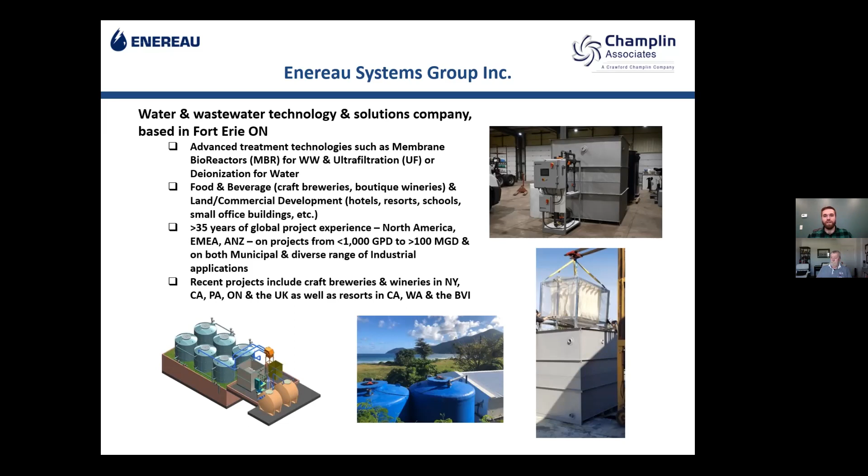We're a pumps and controls company. We're based in Essex, Vermont, kind of up near Burlington, if you know where that is. But we service all of New England and beyond. We go all the way down to Pennsylvania, Maryland for certain projects. But we are pumps and controls guys. For the main part, we do a lot of work with municipalities. So we deal with a lot of the regulatory side of things that come into brewing.

But we've recently been getting into water and wastewater treatment. And so we rep a number of different treatment systems here for high strength wastewater as well. We do everything from pH adjustment to pumps to treatment and everything in between that you could possibly think of. So we service all of New England.

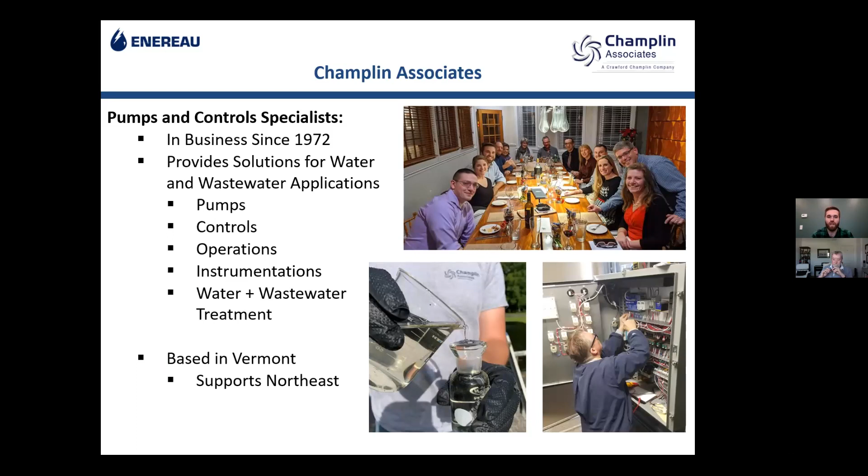Okay, so brewery wastewater. What's the big deal?

So what's the big deal about wastewater coming out of your brewery? It feels like it's just beer, yeast, hops, some other stuff. It's not like you're dumping a bunch of harmful chemicals down the drain. And plus, you just want to brew beer. You're not interested, and you frankly don't have the time for managing your wastewater as well.

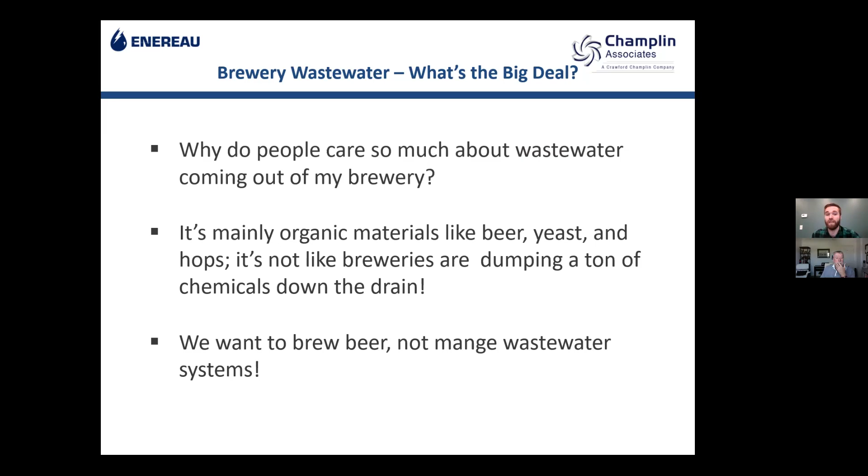And while these thoughts are totally understandable, the creation of wastewater is part of the brewing process, and it's important for brewers to know the basics of wastewater because frankly, you create a lot of it. In order to understand the impact a brewery has on its town's wastewater treatment plants or its private leach field and why so many regulations are put on breweries, we need to understand some basics about wastewater and how it's treated.

So, wastewater at treatment plants and for leach fields is typically measured in two main factors. You have flow and biochemical oxygen demand, or BOD. Flow is simply the amount of wastewater produced, and it's typically measured in gallons per day, while BOD is a measurement of organics in water. So you can think of it as how strong your wastewater is.

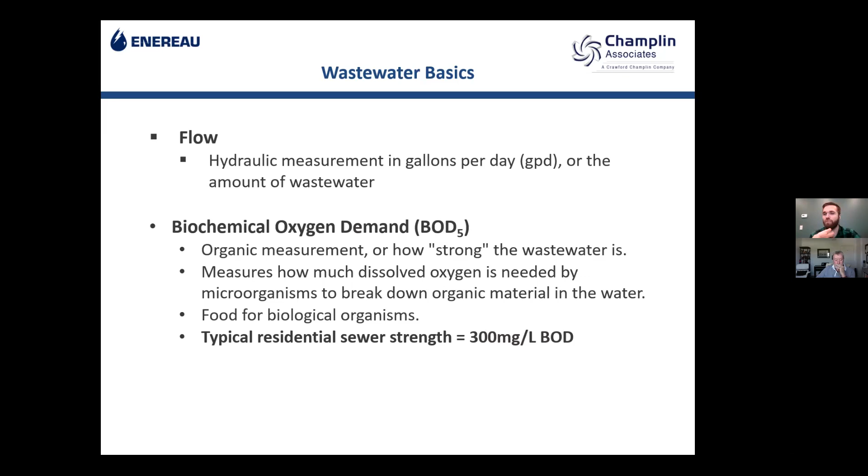A good way of thinking about BOD is as food for biological organisms. These organisms that live in your municipal wastewater treatment plant or septic system need food and oxygen to survive. So if too much food, BOD, is introduced in your wastewater, the organisms will reproduce too quickly, consume all the oxygen in that system, and die, killing the entire plant. For reference, residential strength sewer, the stuff that's coming out of your house and toilets, is measured at about 300 milligrams per liter of BOD.

So wastewater basics, how to measure it. Wastewater treatment plants have a design capacity for both flow and BOD. These two metrics work together to derive how many pounds of BOD a day the plant can handle. To find your pounds of BOD per day, you take your flow in million gallons per day, multiplied by your average BOD, multiplied by 8.34, and that gives you your pounds of BOD a day.

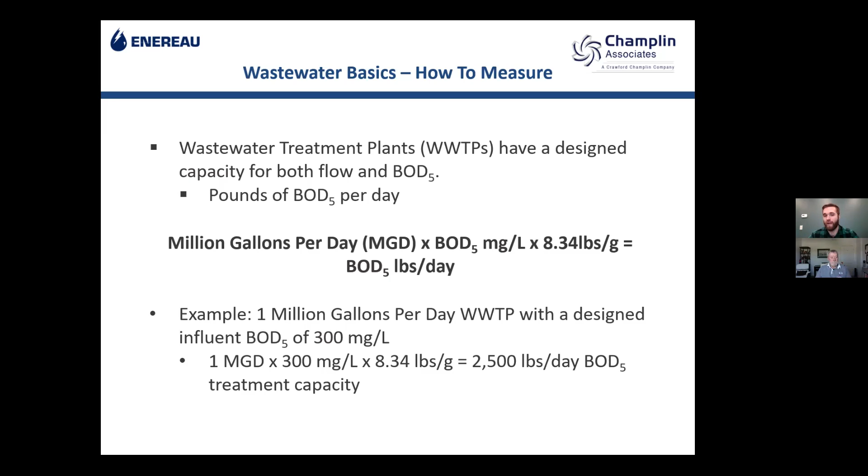So we see here that a 1 million gallon per day wastewater treatment plant designed for an influent BOD of 300 milligrams per liter, which is that regular residential level, has a treatment capacity of about 2,500 pounds of BOD a day. Now that sounds like a lot, but let's look at some brewery examples. Pounds of BOD per day is often how towns measure the wastewater of waste producers as well.

Looking at this brewery example, if Brad's Brewery discharges 5,000 gallons per day of wastewater at about 5,000 milligrams per liter of BOD, with that calculation, they're producing about 208.5 pounds of BOD a day. In comparison, your average residential home produces only about half a pound of BOD a day. That means Brad's Brewery equates to about 417 homes worth of wastewater treatment capacity. Now we're starting to see why breweries are a target for municipal regulations.

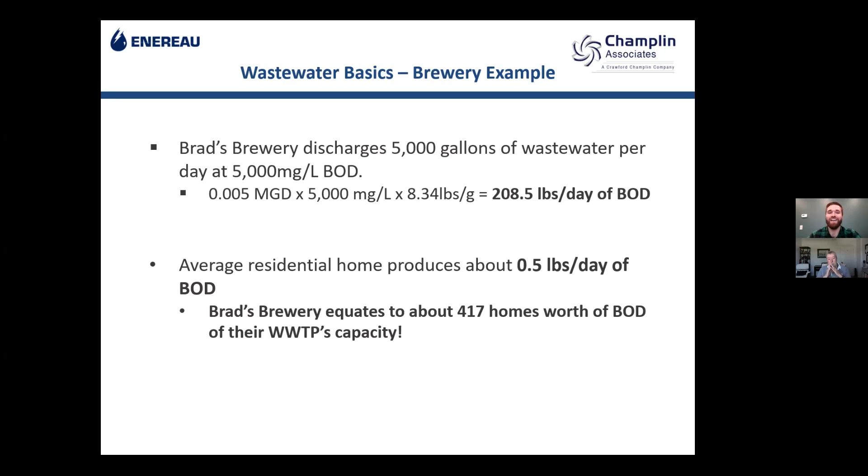And Brad's Brewery's example isn't out of the ordinary. So let's look at wastewater coming out of your average brewery. We see nationally that 2 to 8 gallons of wastewater are produced for every gallon of beer. If your brewery has great process control, you may fall between 2 to 4 gallons of wastewater per gallon of beer, but most breweries fall between 4 to 6 gallons, and those with very poor process controls can go above 15 gallons of wastewater for every gallon of beer that you're brewing.

For BOD, breweries typically fall between 3,000 to 7,000 milligrams per liter on average, with great process control being as low as 2,500 milligrams per liter and very poor process control averaging over 15,000 milligrams per liter of BOD, which, when you put it in that calculation, equates to an insane amount of pounds of BOD, taking up a lot of that wastewater treatment capacity.

For reference, pure beer can be measured at over 65,000 milligrams per liter of BOD, which means that 1 gallon of beer equates to about half a pound of BOD, which we just saw is the same amount as a single residential home.

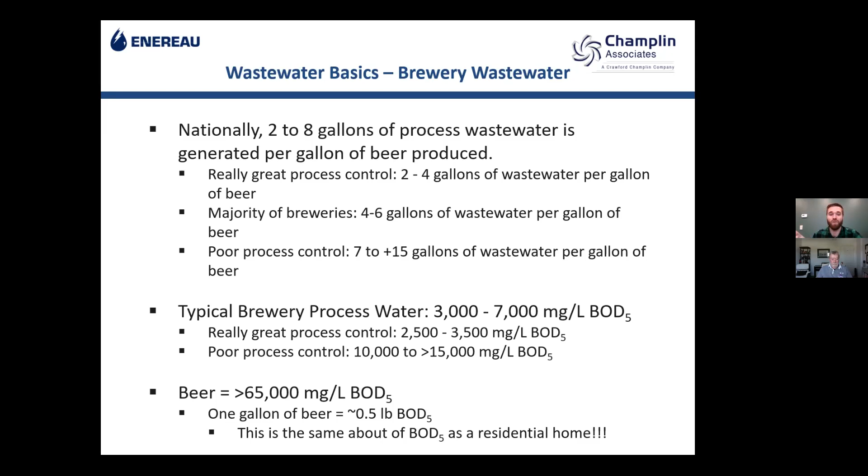So brewery wastewater is some pretty potent stuff. But what's the typical response to brewery wastewater by municipalities? One big response that we're hearing is to tax them into submission. In order to protect themselves from industries dumping all their waste down the drain and overloading their wastewater treatment plant, many towns are starting to implement high-strength wastewater surcharge fees.

Other times, municipalities may not even take your wastewater at all if it's over a certain BOD threshold. Typically, we see that around 300. It depends on your municipality, so you'll need to be in contact with your local town and whatever your governing ordinance is to see what those levels are.

But if your municipality isn't letting you dump down the drain, that means you're being forced to pay someone to haul all of your wastewater to a different wastewater treatment plant that will actually accept your wastewater. And that's going to be some astronomical hauling fees if you're hauling just about everything that you make away.

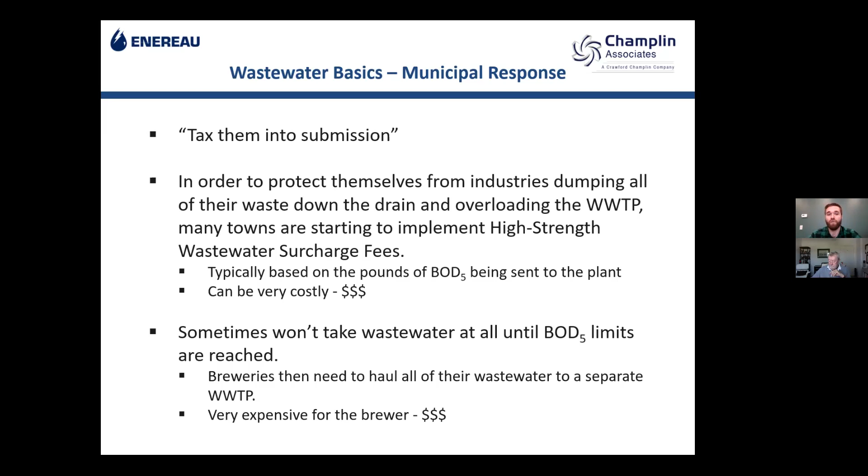So now what? All of that probably sounds like some really bad news so far, and you're probably asking, great, I know I have a problem. How do I fix it? And that's a great question. So there are two main things you can do to bring down your BOD right now: sidestreaming and pretreatment. So every single brewery should be using sidestream practices, regardless of their size.

Sidestreaming is just the process of taking process waste from different brewing stages and removing it from the waste stream. This includes any practice that reduces the volume of process water generated or keeps high-strength waste out of the process wastewater. That includes the separation, collection, or removal of high-strength solids like your spent grains, high-strength liquids like spilled beer, and first rinses, and taking this collected waste offsite for reuse or disposal, whether it be compost, feed to pigs, maybe a digester or something like that.

By separating and collecting high-strength solids, your spent grains, mash tun, trub, yeast, and liquid, your first rinse, keg dumps, spilled product for offsite disposal, you can significantly reduce the BOD of your wastewater. Oftentimes, though, sidestreaming isn't enough to avoid those high-strength waste fees. Even with great sidestreaming, you're probably hanging around that 2,500 milligram per liter BOD mark if you're very good at your sidestreaming.

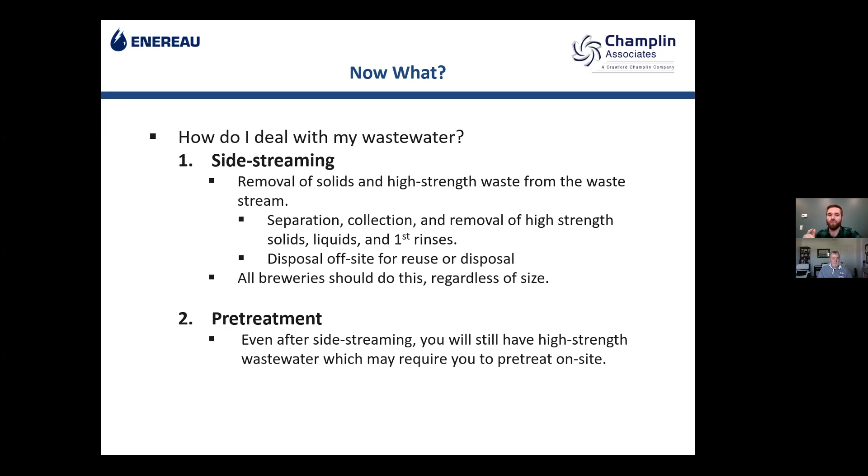So sidestreaming might not be enough to meet your regulatory standards or to keep your septic system from getting overloaded. In that case, you need to start looking at some pretreatment systems. So now that you have the basics of wastewater down, kind of flew through that, I'm going to turn the rest of the presentation over to Jim from Enereau to talk about sustainability and pretreatment.

First, I'll take myself off of mute.

Okay, so as Alec asked right up front, why are we doing this? Why are we treating brewery wastewater? Well, apart from the topics that Alec covered, it is the environmentally responsible thing to do for any high-strength, potentially hazardous wastewater. And what's coming out of the brewery, as Alec indicated, is very high strength and potentially hazardous to the sewage treatment plants. And also because of some of the pH levels coming out of breweries, it can be very corrosive to the sewer lines, or very damaging to the wastewater treatment plant when it gets there.

What we've seen is a well-designed and well-managed and operated wastewater treatment system can actually give you a decent ROI on your investment, certainly if you're offsetting sewer surcharges or limits on what you can actually haul off-site. Cost of non-compliance is unsustainable. Alec mentioned the surcharges. We see the same numbers all over the place.

We've seen breweries that have been told they have to shut down because they're no longer able to send their waste anywhere. And if you're in a rural area, it doesn't take long for a couple of gallons of brewery waste to completely destroy a septic tank. So they don't work on brewery waste. So non-compliance is no longer an option. Next.

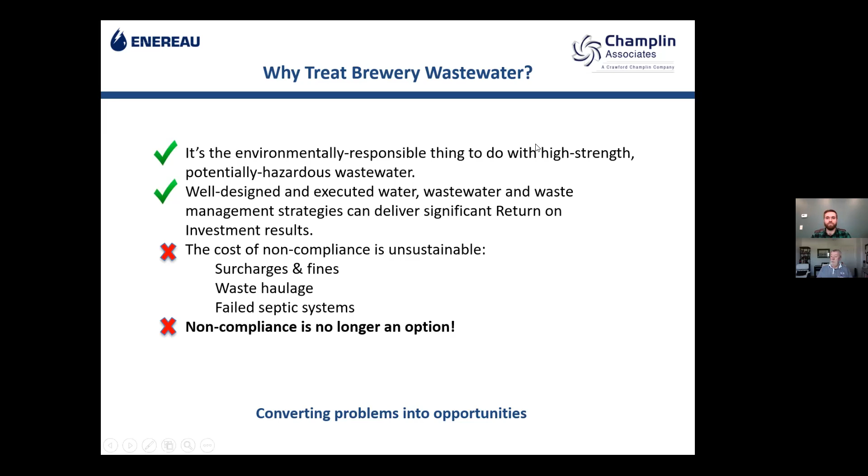Yeah, there we go. So, like most of us, we can bury our head in the sand and hope that the problem will simply go away. But that's unlikely to happen. So it's not going to be a simple solution just to turn your back on it. So we need to start embracing wastewater management as a critical part of the business. You're making a product, you have to deal with the waste that's associated with that product, just like any other industry. Next.

As Alec also indicated, the breweries are extremely liberal in terms of their water consumption. We have seen breweries that are over 10 to 1. I think the best managed brewery in the world is probably Carlsberg right now. That's around 2.4 liters of water per liter of beer, but most are in that sort of mid 5 to 6 range.

Characteristics: if you're doing a caustic rinse, you're going to have pHs as high as 11 or 12. I've seen some breweries that are over 12. Your acid sanitizers, that'll pull you down to less than 3 in some cases. Alec mentioned the BOD, which is probably the one element beyond suspended solids that the local municipalities will come after you on.

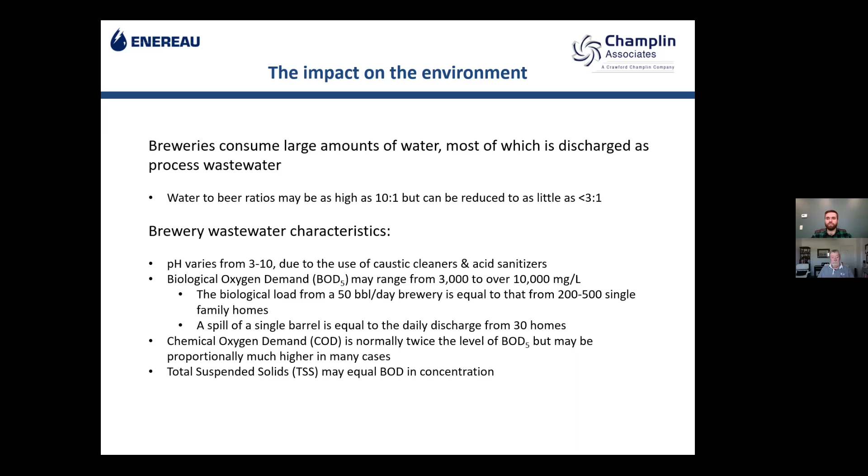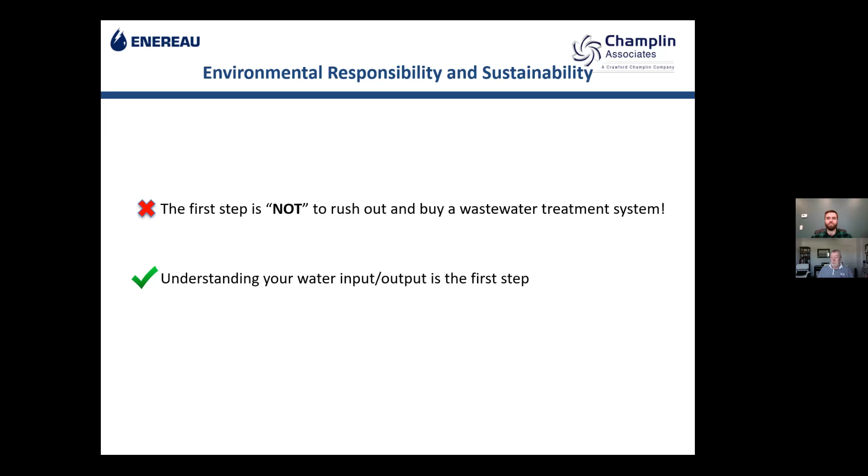But the first step is don't rush out and buy a wastewater treatment system. There are dozens of wastewater treatment systems on the market. Very few are actually designed for craft breweries. Most are essentially designed for sanitary wastewater. And dealing with a wastewater stream that's 10 to 20 times stronger than sanitary wastewater has a big impact on what kind of wastewater treatment system you buy, but also on the nature of the system and the system size itself. The first thing you need to do is figure out what is actually in your wastewater stream. Next.

So before you go out and talk to wastewater companies or consultants, it's really valuable to do a deep dive on your operations. What's in your wastewater? Where are you using water in your operation? How much are you using at each stage? Do you have hoses that are just running open? I went out to a brewery in Oregon a couple of years back, and basically was wading through 2 inches of water because of a fire hose size hose that was just sending water all over the floor of the brewery. Plus, everything that was in that stream got flushed down the sewer.

What's in your wastewater? Alec mentioned BOD and TSS, but it's also important to actually measure COD, the pH, obviously, total nitrogen, total phosphorus, and the total dissolved solids, because they all have an impact on how you treat those wastewater streams. Where can you eliminate some of your waste or your water usage? If you have open hoses, that's a tremendous drain on the system, pardon the pun. Do you really have to flush everything down the drain?

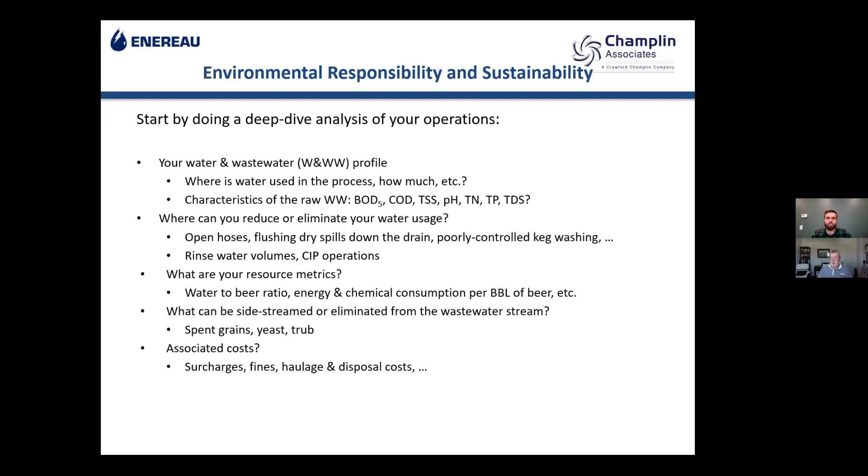I don't need to tell you, you probably know better than I do, but every time I talk to a brewer, he keeps telling me he doesn't actually brew beer, he cleans. 90% of what he does is cleaning tanks and fermenters and everything. So if that's what you're doing, what are you actually putting down the drain? In many cases, it's not beer. It may be spent caustic. It may be peracetic acid. It may be cleaners. So figure out what you are actually putting down the drain.

Or if you have to put it down the drain, meter it into the drain and don't just pour it down, because that will overload anything it hits. If it isn't a liquid, try sweeping it up.

A hose is probably the worst environmental unit in a brewery, because you spill something on the floor, you get a hose with a big nozzle on it and you flush it down the drain. Go get a broom. The cheapest thing you can do is go buy a $3 whisk broom and sweep it up, not put it down the drain. Segregate whatever goes down the drain.

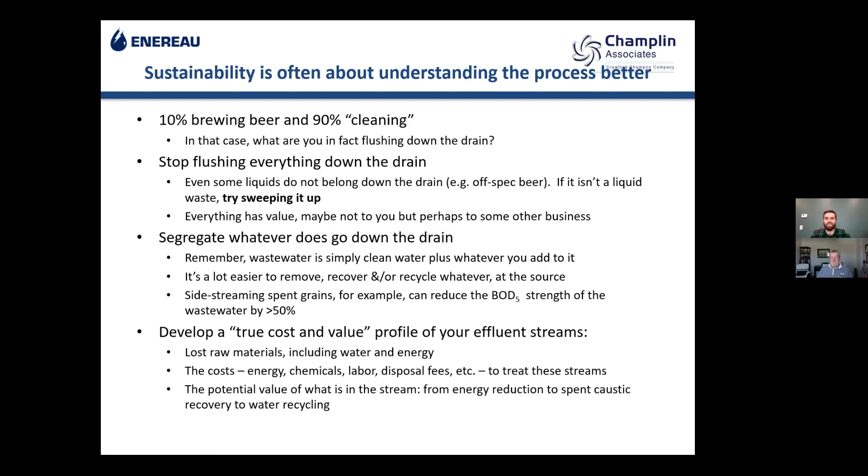So as Alec indicated earlier, once you go through all of the steps to minimize your waste stream, and you come to the conclusion that we've done everything we can, we still have relatively high BOD, we still have TSS issues and pH issues, the first step is primary treatment, which is basically, how do I intercept the non or poorly biodegradable solids? So can I screen those out?

There's some things that definitely should not go down the drain, including bottle caps and smashed glass, but also stuff that you might normally put down the drain, like grains and yeast. Can you capture those and pull them out of the stream before it becomes a wastewater stream? So it becomes a solid waste, or a solid byproduct that you can get rid of to a farm or some other application.

Equalization is very important, particularly with craft breweries, because you do have different types of waste that come down the drain over the course of a day or from day to day. You may have highly caustic rinse waters for one period of time, followed by highly acidic wastewaters for another period of time, and then cleaners or just who knows what's in there. So if you can put in an equalization tank, it helps balance out those variations.

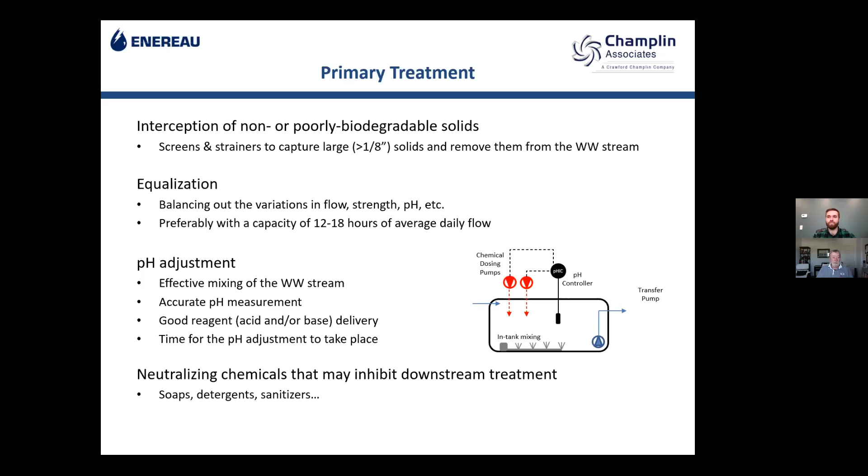So that's the pre-treatment that pretty well every craft brewery should be putting in. And most regulatory officers, the first thing they look at will be pH. Then they'll look at BOD, and then they may look at TSS. If you have a pretty good pH adjustment system and you're getting your side streaming in line, you may be able to get by with just some primary treatment for a period of time, or at least indicate that you're on the path to developing something that is more appropriate.

Sooner rather than later, you will probably have to get into some sort of advanced biological treatment. You're dealing with organic material. Basically, it's organic food. And just like your body, you have a biological digestion system that will break down the organic materials that come down from the brewery. And so almost all wastewater treatment systems that are going to breweries are a biological system.

If it's an extremely large brewery, like an Anheuser-Busch or a big Carlsberg plant, they may be anaerobic digestion systems where you're capturing the methane to reuse as fuel. But those types of technologies are very unsuitable for most craft breweries. Essentially, they're a time bomb if you don't run them properly, because you are creating very volatile gases in these systems. So we don't recommend them for pretty well any craft brewery anywhere in the world.

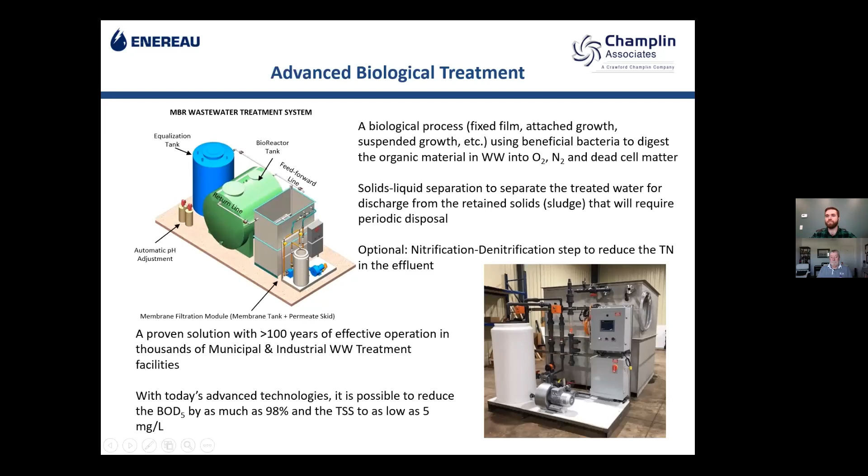However, now that's putting the system in. So these are not systems, I need to stress this, that you put in and you turn it on and you walk away and never come back. It is a mechanical system working on a living biomass. A biological system is a living biomass. So it does need to be monitored for biological health.

So what are you sending in there on a daily basis? What's the BOD, the COD, what temperature it's coming in at? What's the dissolved oxygen concentration? What is your food to nutrient balance? Typically, most biological systems like a balance of 100 to 5 to 1 of carbon to nitrogen to phosphorus.

So if you've got a lot of beer coming in there and you don't have very much nutrients, you might have to add some nutrients to keep that balance in line. Most sanitary wastewater is already balanced, but processed wastewater from food and beverage operations can quite often get out of balance, and that's where you need to add some nutrients, sometimes on a daily basis, sometimes less frequently.

What are the key performance indicators in your particular operation? What is your actual flow versus design flow? If the system is designed for 20 gallons per minute and you're actually trying to treat 40 gallons per minute, it may not have enough residence time. On the other hand, if you're designed for 20 and you only have 2, then maybe you don't have enough food in there to keep the biomass active. So you need to keep an eye on things like flow and how to change the system if the flow goes up or flow goes down.

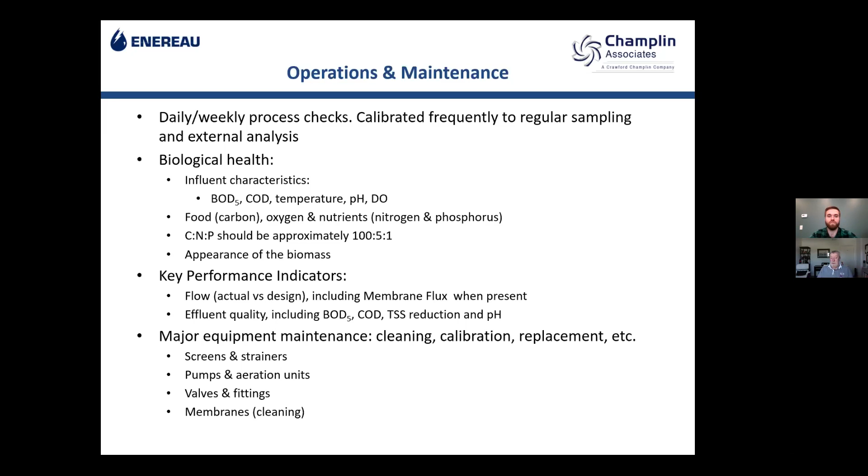Back to you. Great. Thanks, Jim.

So, in summary, brewery wastewater is not a joke, and it's important to have basic knowledge about your wastewater, because you guys create a lot of it. Also, municipalities are starting to crack down on breweries specifically. So the time to start addressing your wastewater really was a while ago, but at least now. And you guys really need to understand, as Jim was saying, try to understand your wastewater as well as you can.